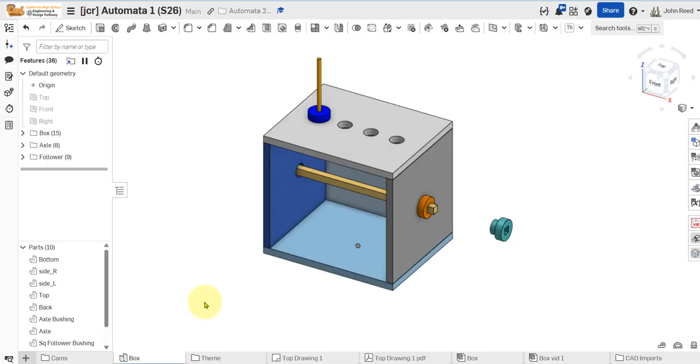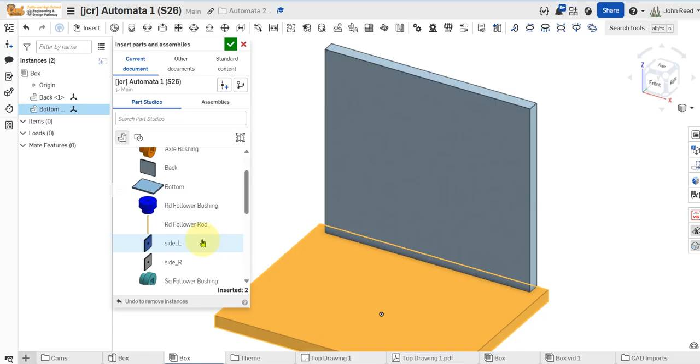To do that, we're going to make another assembly, and we'll call this assembly box. Into that assembly, we're just going to put the back, the bottom, the two sides, and the top. Where's the top? There it is. So we're going to just put that in there. Then we're going to fix the bottom.

We have to have one fixed part in every assembly. Then we're going to grab the whole thing and add a group mate.

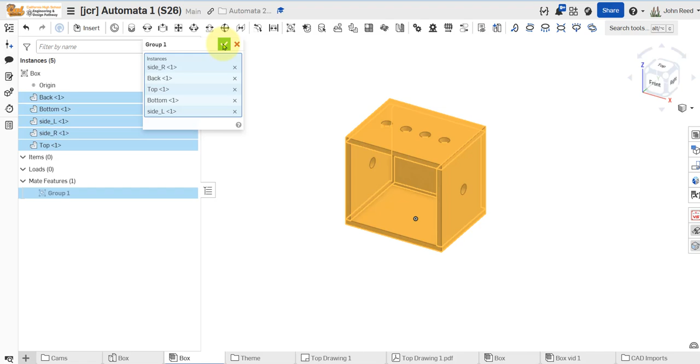And now everything's together. We are going to come over here to the BOM table. Since we don't have a part number, we're going to remove the columns for part number and description, and then add a column name, like we always do. So there's our bill of materials.

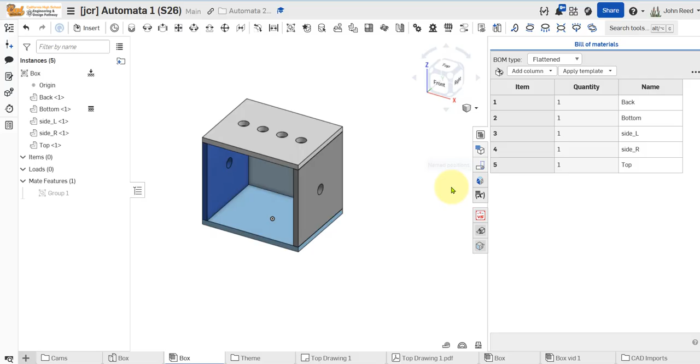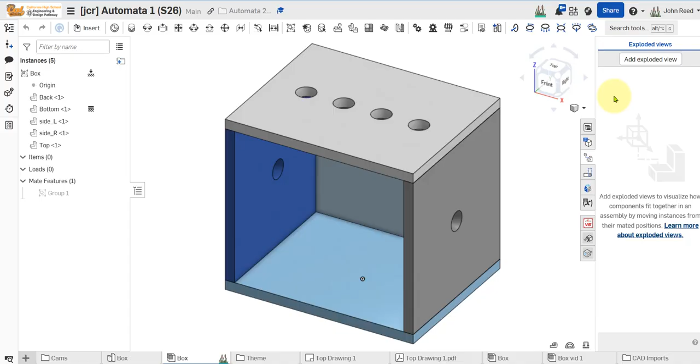And now we are going to make this an exploded assembly. Where is our exploded assembly choice here? Let's refresh. Sometimes Onshape loses its marbles. There it is. Okay, so how can we make an exploded view which will tell us how to make this box? Here's one way to do it.

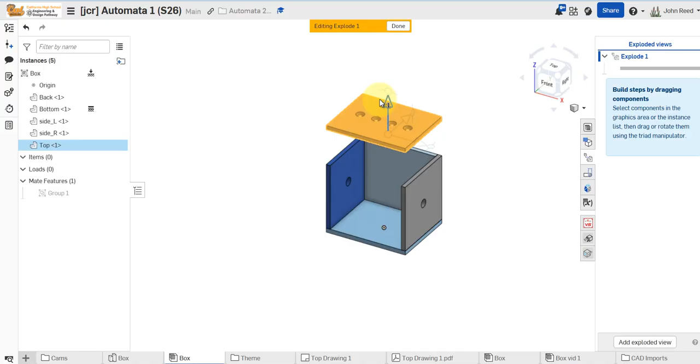We'll click on the top and we'll move up about 6 inches in that direction. 6, enter. Why isn't that working? It's not working because I have to hit add exploded view. And then we'll click here, and move up, and that shall be 6.

And then we'll add another step, in 2 steps. So on the right here, we'll click there, we'll move up 1 inch, accept that, and then click on, and pull out over this way, I don't know, 3? Let's try 3. That kind of shows the little exploded trailing lines - it shows it comes in and then goes down.

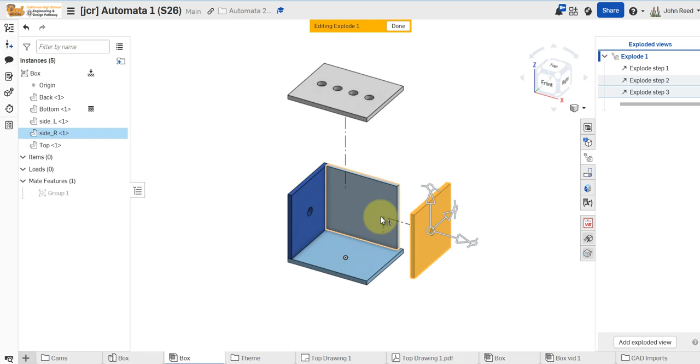So that might be useful if we're trying to illustrate how to manufacture this thing. We'll do the same thing on the left side: go up 1, and then back -3. And then finally we'll go to the back and do a similar thing: go up 1, accept that, and then drag it out this way by 3. Let's see if that works.

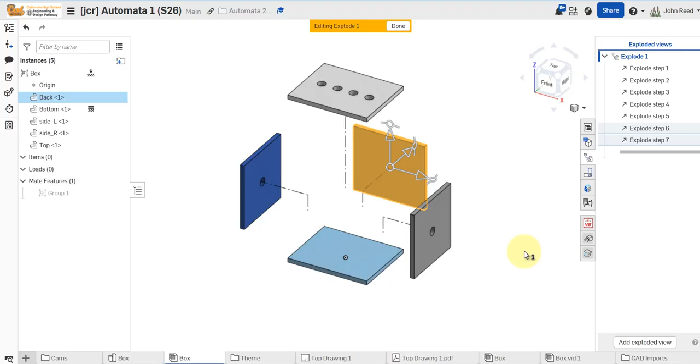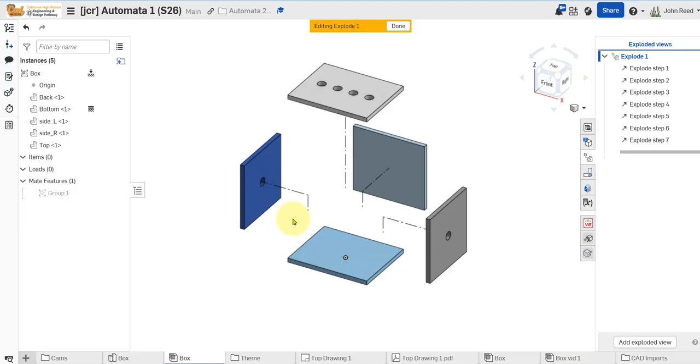It seems to look okay. Maybe we don't want the overlap here, so maybe we come over to this one, and pull out 4 instead - go a little further out there. We could also adjust the 3 but we don't really need to, since it's already very visible. So let's do that.

Okay, so we'll right-click, create a drawing of that box. Choose a size A inch. Come over here.

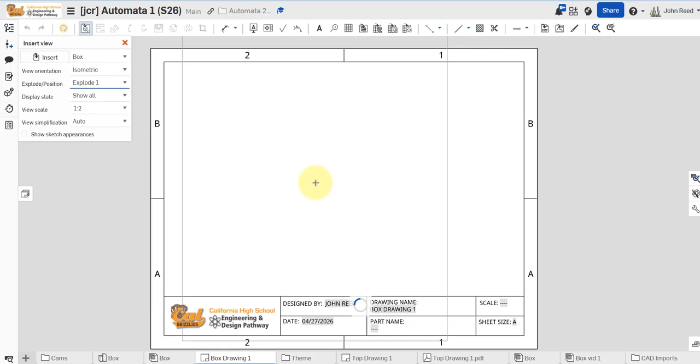We're going to want an isometric view and an exploded view. When I did it before, it just barely fit in there - I think that's good, we want it to be nice and big. So let's click there and place it. Let's right-click, show shaded views. This one still kind of obscures that one, but that's okay, we can live with that.

Let's come over here to bill of materials. Make sure the upper right corner is fixed, and we'll place it right there.

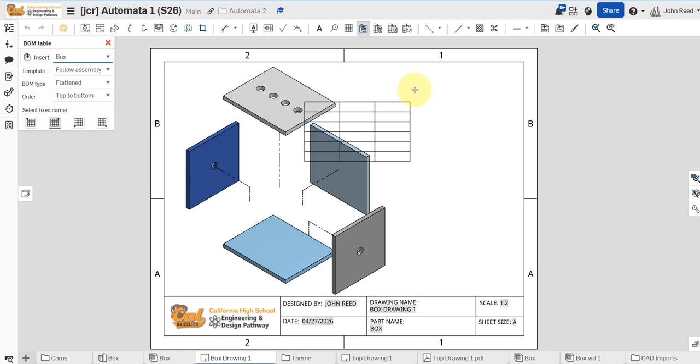And now we'll add the callouts. You want to have those right on the edge, as you'll remember. So that's callout number 5, number 1, and the numbers correspond to the part names in the bill of materials. Number 2, and finally number 3.

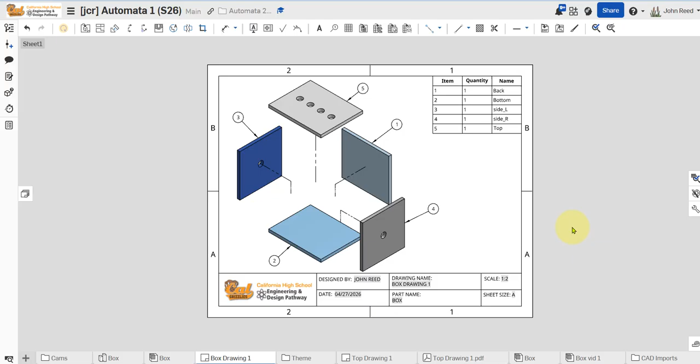And that is our assembly drawing exploded. What you can also do is export this thing into the form of a PDF. You don't have to do this, but oftentimes if you do that, it'll put another tab here and also ask if you want to download it. So that's a good way to get that out so you can print it.

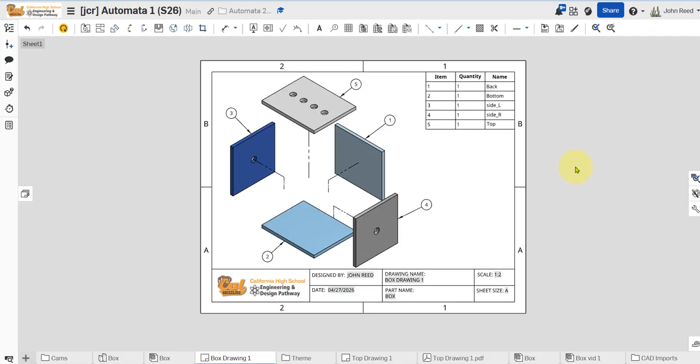Okay, so that is our exploded assembly drawing of the box itself - it kind of shows how to add some glue there. Maybe we also add a little note here, in all caps: pieces glued together with wood glue, just to be super clear.